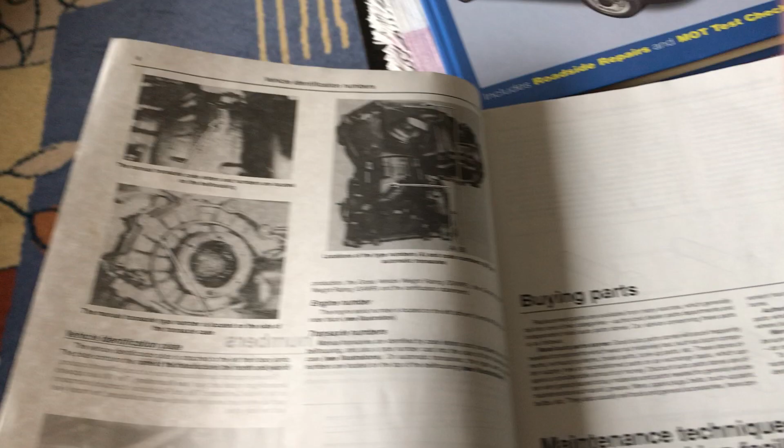But obviously, eventually I couldn't afford to keep running that on a hire basis. So with the help of a friend of mine from California, I went out and bought a Rabbit. And it kept going wrong, the little monkey.

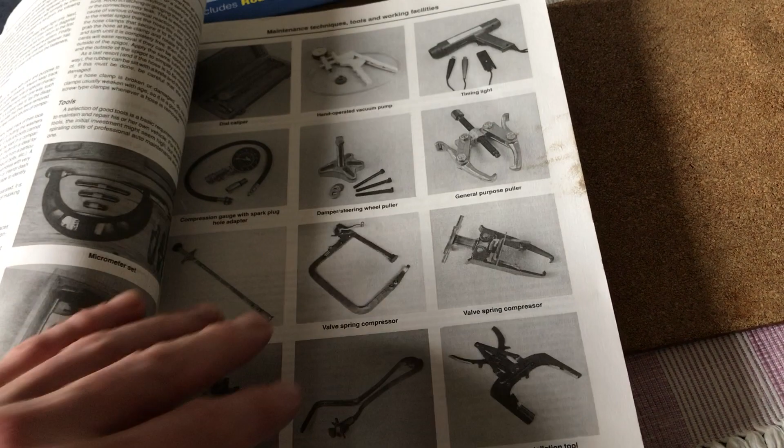So I bought this book to fix it, with a lot of help from my friends. Yeah, you can see my greasy thumbprint is on it, innit? I was under its bonnet quite a lot.

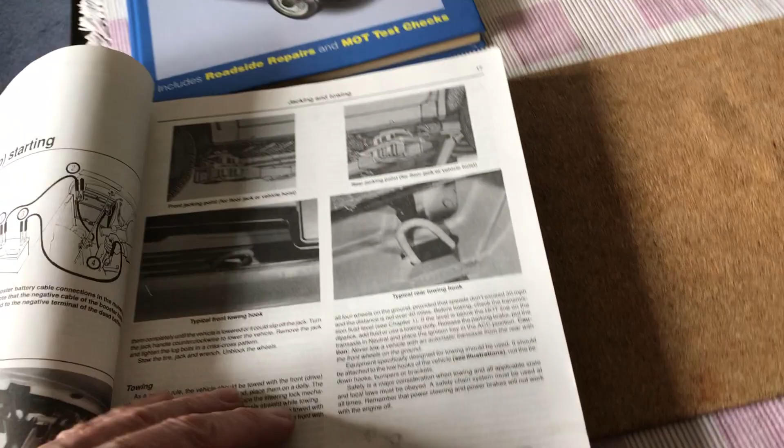Yeah, I loved it though, don't get me wrong. I loved the car, it was a really, really good car. What was it? I think it was a 1.8. Was it 1.8 or was it 1.5 or 6?

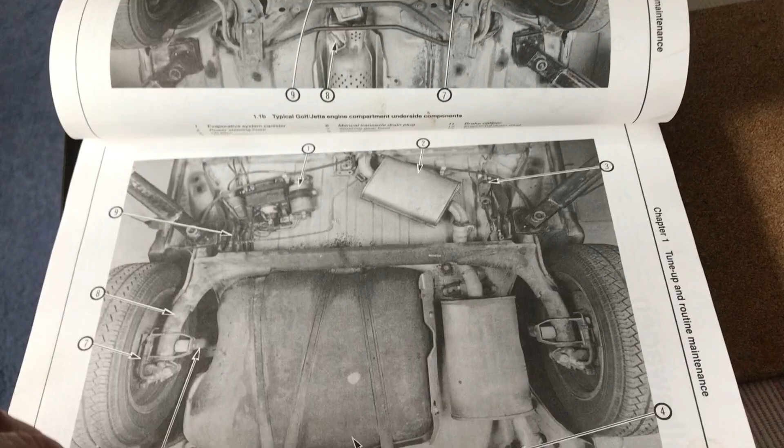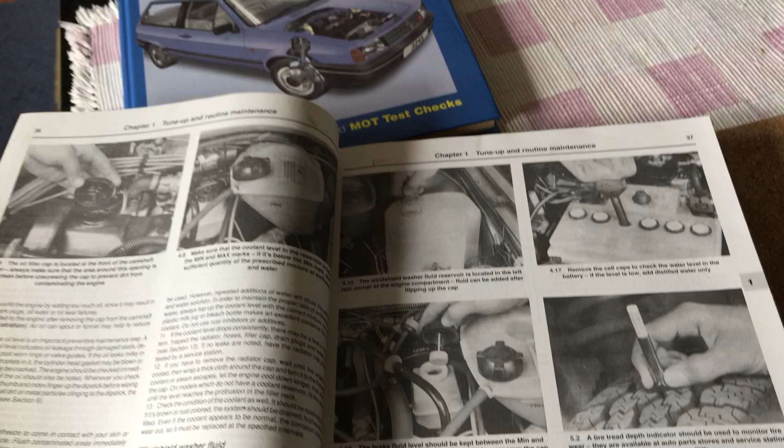Although it had quite a few things wrong with it, I fixed them up and got it going. And of course, California is hot as hot, so there's no corrosion on cars. The only thing you have wrong with them is mechanical, usually. And I got all that sorted out, and the body on it was beautiful.

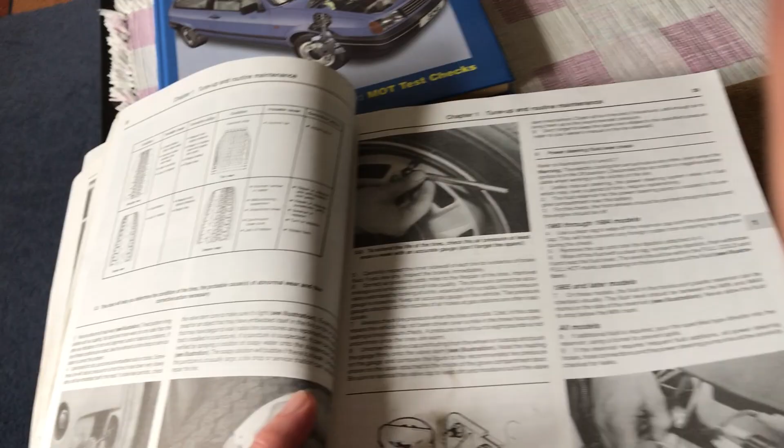It was a green colour, like a dark forest metallic green, and it had on the back of it a rabbit insignia, which was like a rabbit having it off with another rabbit - that was the insignia bit. So that always made me chuckle.

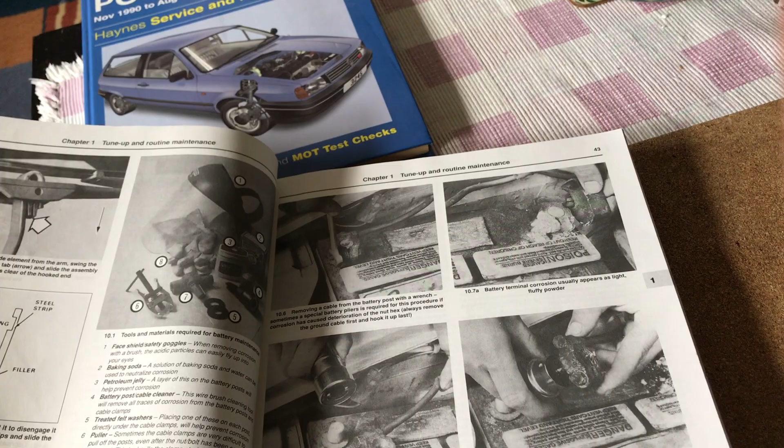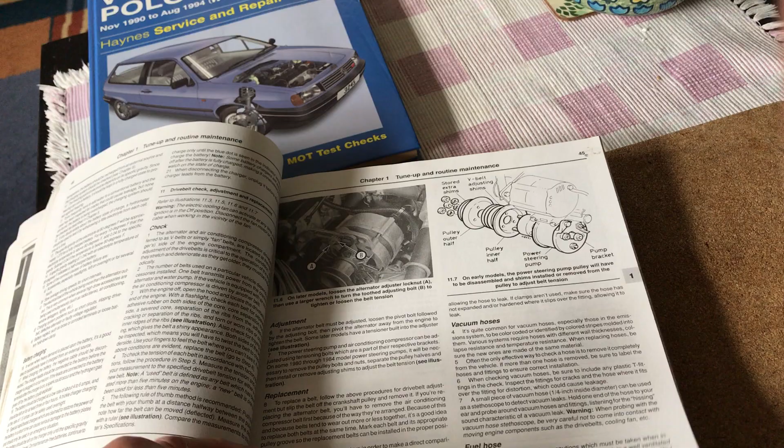I loved driving that car, it was awesome, and it was an old one. I mean it was from about 80, 81, 79 even, I think it might have been. But yeah, I loved it. I thought it was cool, and I had to leave it there, unfortunately.

When I came back from the States, I couldn't keep it. It was left-hand drive anyway, so it wouldn't have been much use in the UK for me.

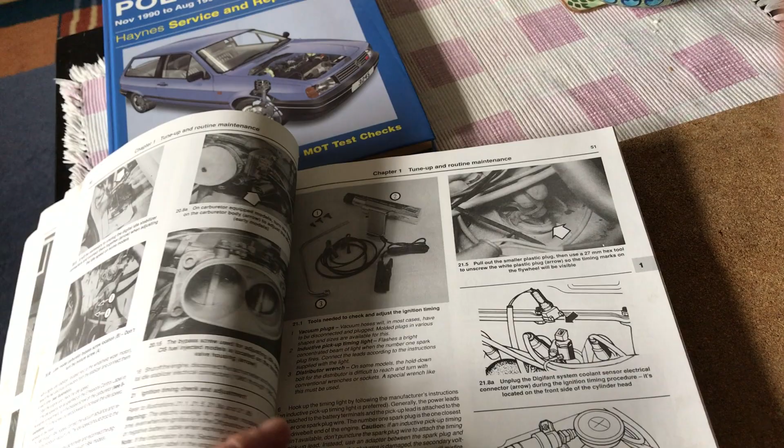But yeah, this book just covered everything. Haynes manuals, they're awesome, really, really, really good manuals. They cover all sorts of aspects.

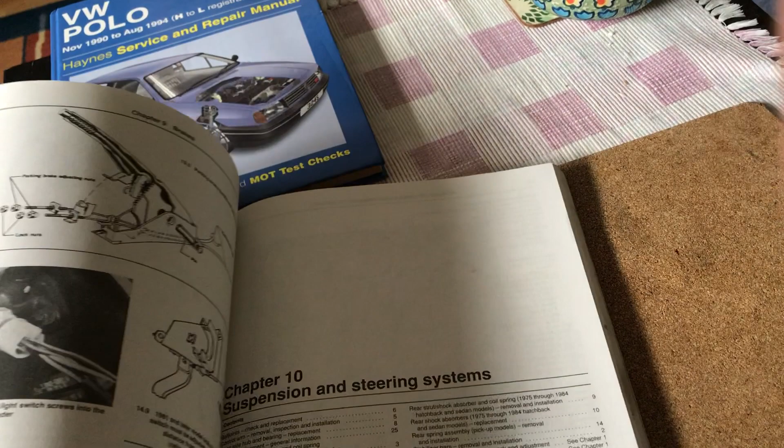It's a full strip down and rebuild of a car, basically, and they cover all sorts of material.

Clutch - I think I had problems with my clutch, on the not my crutch, the clutch. The crutch was working in those days, the clutch wasn't though, on the car.

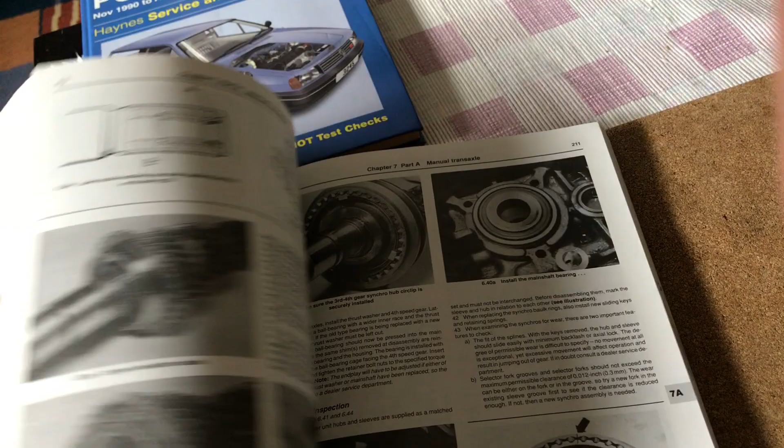But yeah, they did all sorts of engine, electrical systems, there's wiring diagrams for all of it as well. Not that I ever understood that, but friends of mine did, and they used to look through it. You can see the grease that was on our fingers as we were poring through this thing.

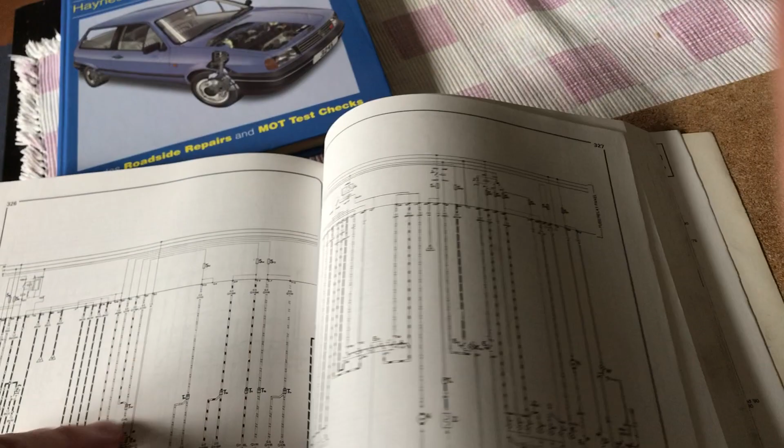I don't know if there's any sort of interior bits and bobs and stuff, but they're very good manuals, these are. I'm sure you can still get hold of them if you need to.

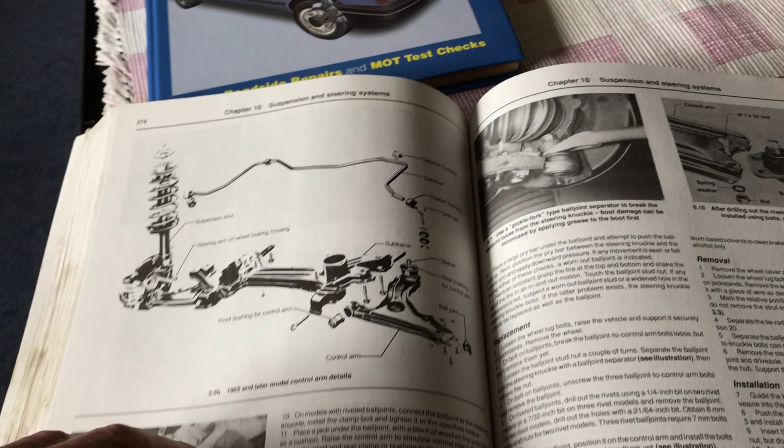So it's track control arms, you know, for suspension and things like that, stabilising rods and stuff for the suspension systems. The Volkswagens are really, really lovely cars.

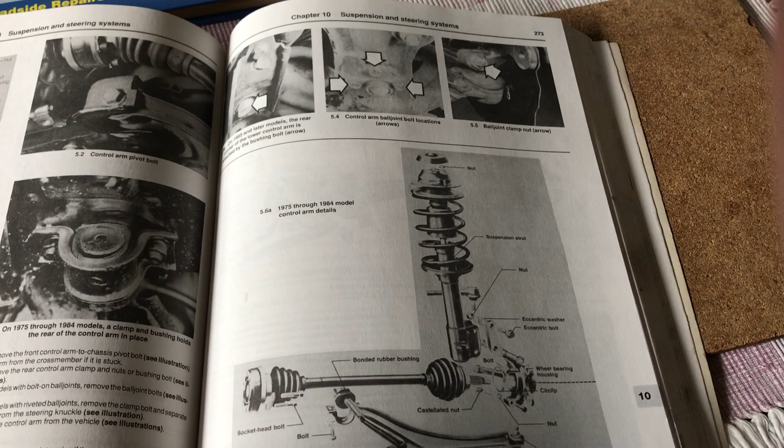I don't know about nowadays, to be honest with you - dubious, but in the old days, in the 80s, they were awesome vehicles, really well built.

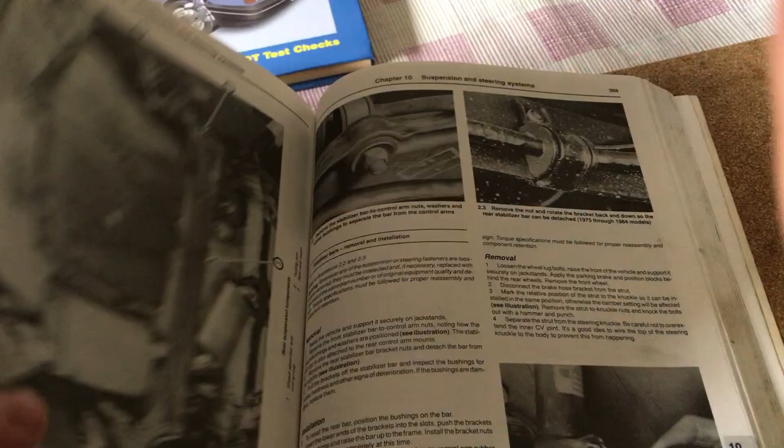You know, Wolfsburg built them in Germany, and I had another one, the Polo, which I had the manual for too, obviously, because I needed to. That was my car, although mine was white.

Again, a lovely car to drive, and really, really lovely to own. Well, my dear old dad helped me buy it. But I had this manual.

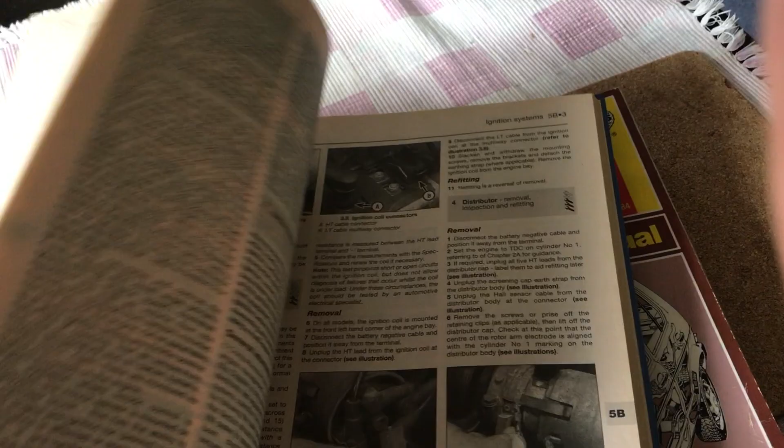If you're confident, right, you've got a good toolkit, and you fancy a bit, be safe. Obviously, have axle stands, don't go under cars that are jacked up on jacks, unless you've put a log under there or something to hold it up in case the jack slips. Stuff like that.

Because a friend of mine was actually very seriously injured when the car fell on him and crushed him. And although, ironically, it was strange, it was like one of those incredible Hulk moments where his mum was so desperate to save her son's life, she just lifted up the car, and I mean that, I swear to God.

I mean, it was on 3 wheels, so she was only lifting up one corner of it, but she lifted the darn thing up whilst her husband dragged their son out from underneath, and he was okay, he lived. But that was adrenaline, I guess, for her to save her lad.

But no, I forget the car now, I think it was an Austin Allegro or something like that - when the wheel falls off, Allegros. What a dreadful car, I'm glad they're gone.

But no, to cut a long story short, there you go - Haynes manuals, go for it, if you feel confident, and be safe, as I say.

You can do a lot of your own mechanics, save yourself a lot of money, innit?